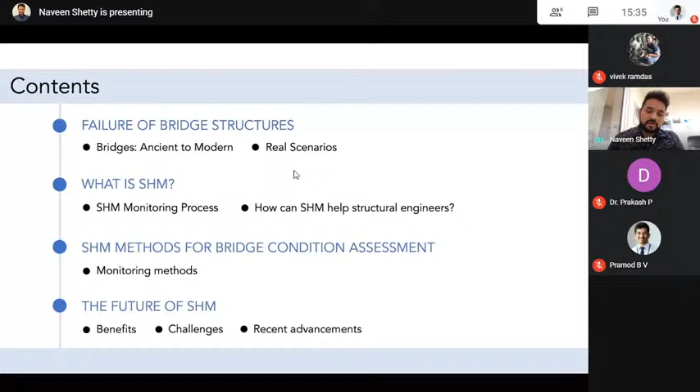We all know that bridge structures represent a significant proportion of traffic infrastructure. In earlier days, bridges were usually constructed using locally available resources such as bricks, blocks, and lime and cement mortar, and they were designed only for very short span lengths. But the greatest revolution came with the development of the industrial sector, where the volume of traffic increased, and the weight of vehicles also increased. So steel truss bridges came into existence, given main priority because they could cover larger spans and resist heavy weight.

Another important innovation is the suspension bridge. They can cover very large span lengths and avoid any intermediate interaction—they don't have intermediate structures and can cover very large spans. This was one of the very innovative solutions in bridge engineering. With modern developments in concrete technology, by embedding steel into concrete, post-tensioning and pre-tensioning concrete bridges have also been widely used all around the globe.

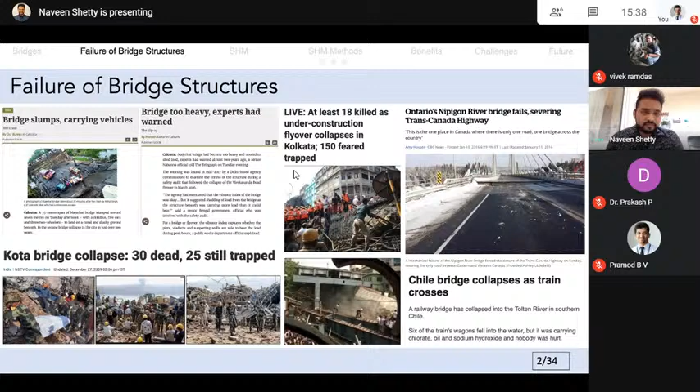So I would show you some real scenarios. This is the first, very recently in 2018, the collapse of the Morandi Bridge in Italy, which was a major disaster that killed almost 43 people, with many severely injured. The latest reports indicate that this bridge was exposed to air pollution from nearby industries, and also had salty sea air. This led to corrosion development in the bridge, and the inspection was not properly performed, so finally a 200-meter section of the bridge collapsed. This is one of the major disasters that happened, and what we learn from this incident is that disruption to traffic infrastructure can have a tremendous impact on economic growth and also on the daily life of citizens.

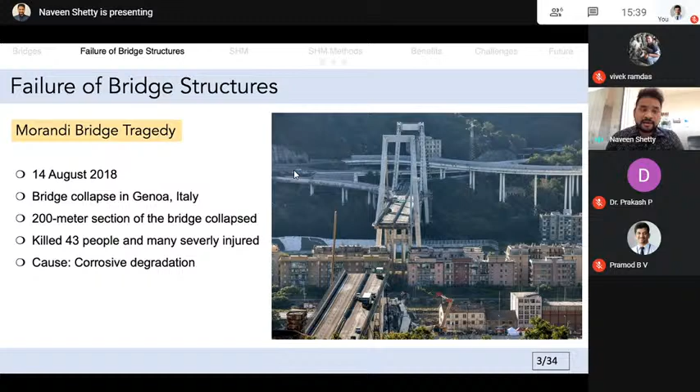Very recently, this year in April 2020, another bridge collapsed in Italy. Due to the coronavirus pandemic there was a lockdown in Italy, so there were not many people traveling on this bridge during the time of collapse, and only two people were injured from this incident. Reports indicate that there were major cracks developed in the pavement of this bridge, and it was reported to the building inspection people to have a look at these cracks, but they reported, maybe last year, that it was not a major crack and could be neglected. But on the 8th of April 2020, the bridge completely collapsed. This revives the memories of the Morandi Bridge collapse in 2018, and alerts everybody worldwide that there is a need for immediate attention towards existing bridge structures all over the world.

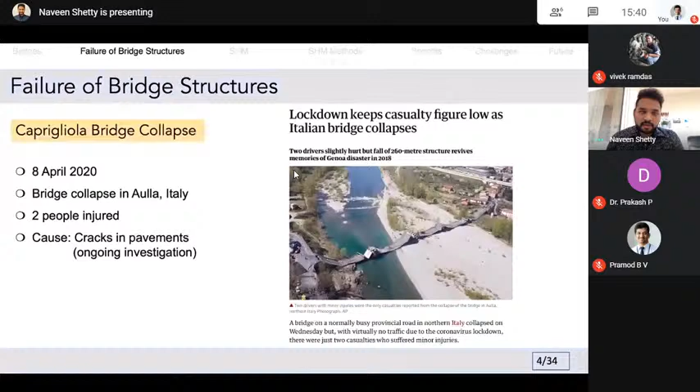And very recently, just 3 days back, a bridge collapsed in Uttarakhand. I would play a short video clip of this.

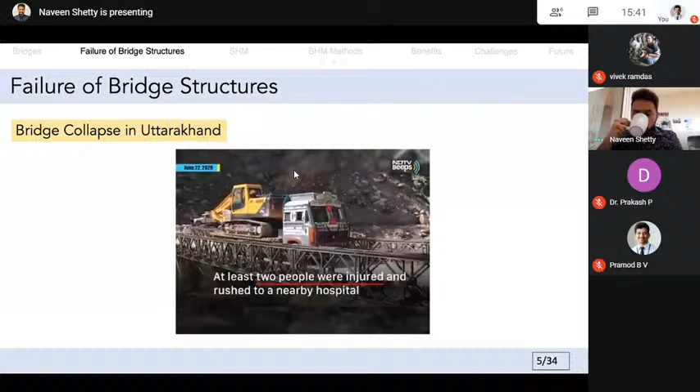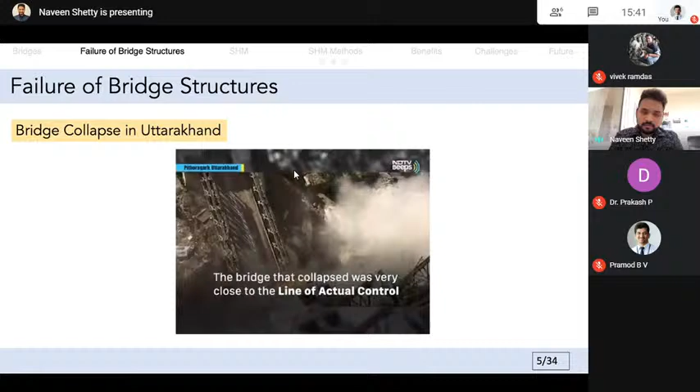So we see that the main reason for this collapse is the truck which was carrying construction equipment. There was a combined weight, and that weight exceeded the load bearing capacity of the bridge, which caused the failure of the entire bridge.

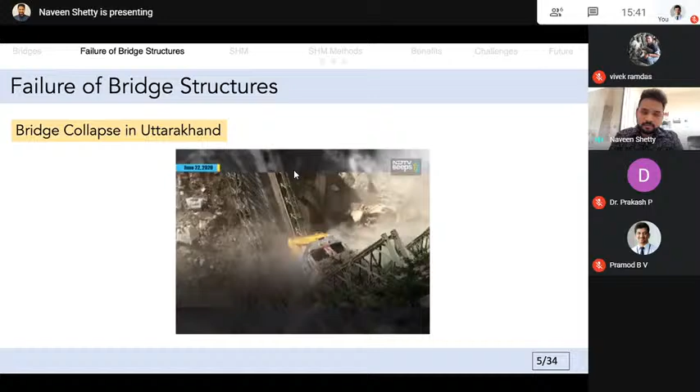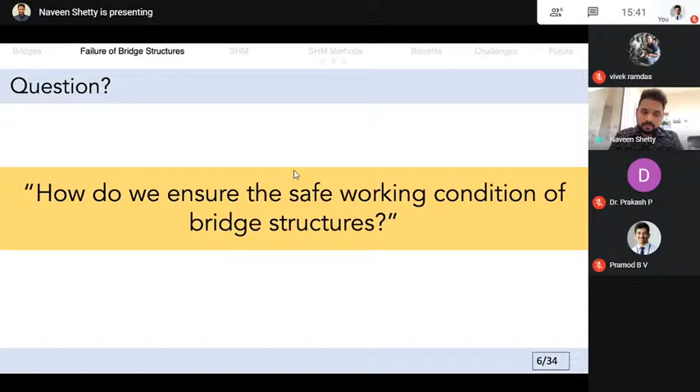So now the golden question is, how do we ensure the safe working condition of bridge structures? In other words, how can we monitor, or how can we prevent such failures of bridge structures? I will relate this to a medical procedure. Normally, when we have a bone fracture, we visit a medical care center. The doctor performs some preventive measures that include lots of tests and screenings, where the doctor tries to locate or indicate the initial damage at a very early stage, rather than letting it become a bigger problem. We can take this concept into our civil engineering context, and treat structures, bridges in this case, as the patients, and we, the structural engineers, as the doctors, using some diagnostic techniques to identify problems at a very early stage.

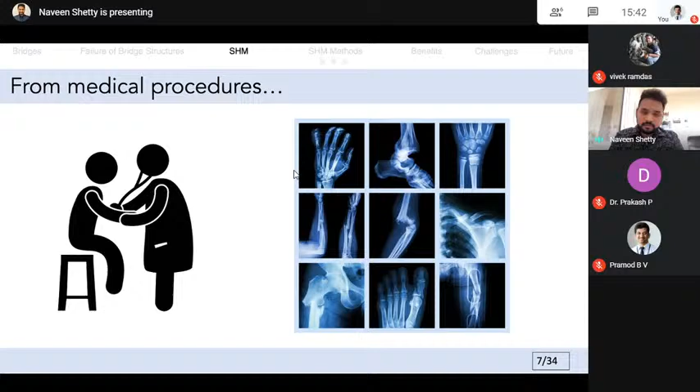So here comes structural health monitoring into the picture. What is structural health monitoring? It is a diagnostic method used on structures to provide important information about structural performance. Nowadays, there are also very advanced structural health monitoring methods which can provide us early warnings even before the damage is foreseen. We can already locate the damages or the intensity of the damage happening inside the structure.

SHM includes a wide range of sensors and also wireless communication, and it is monitored continuously. That is known as real-time monitoring, continuously monitored 24/7.

What is the goal of structural health monitoring? Firstly, it is to detect the damage based on the measurements, and secondly, to locate that damage, in other words, to locate the geometric position of the damage. Thirdly, to quantify this damage. If we know the detection location and we quantify the damage, we can already know the critical condition of the bridge structure.

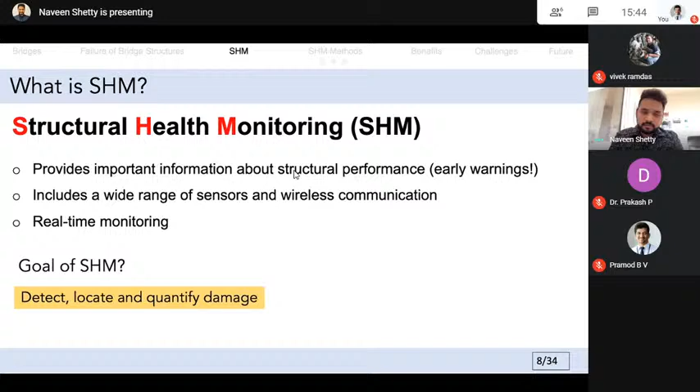The wind speed sensor is usually positioned at the top of the column element, and the temperature sensor is usually deployed at the midsection of the bridge deck to monitor temperature changes. The strain gauges are usually deployed underneath the bridge deck to measure the deflection. Acoustic emission sensors are nowadays usually deployed in the critical zones of a structure, especially in the cables and also in the piers, deck, anywhere. It's a very advantageous method, and I will be discussing it in this presentation in the later slides.

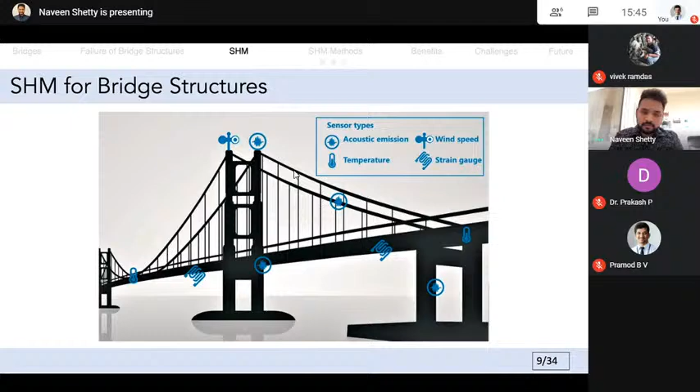The data obtained from all these sensors is integrated together and further processed, and that is known as data fusion. Data fusion is the integration, collecting or gathering the information, and integrating it together. The fused data is further passed to a cloud storage, where we maintain the large amount of data.

Usually now we use a cloud storage platform where we store the data, and then we use certain types of SHM software to perform further analysis. Based on the performance of the analysis, we conduct two other parts, that is reporting and alarming. Reporting is conducted, and based on that we take the further decision of whether an alarm has to be generated or not. This is the process flow for structural health monitoring.

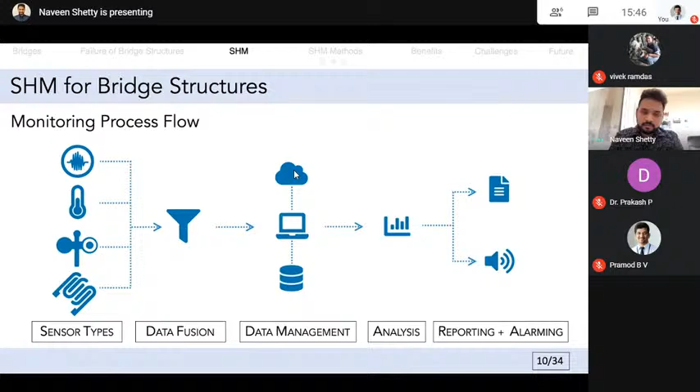Now this is the major question: how can structural health monitoring help structural engineers? Firstly, structural health monitoring gives a very rapid solution, that is, it gives us instant information about what's happening in the structure, and it also reduces the inspection time.

Secondly, structural health monitoring can be easily customized, so we can adopt it to any sort of bridge elements or any type of bridge structure. Another important aspect of SHM is that it is repeatable.

This helps structural engineers monitor the bridges for a very long time. We can also inspect the bridges and look at the maintenance of the bridges for a very long time, and it gives us a lot of information during this period. The information is very related to the structural performance, including structural integrity, or the aging or deterioration of the bridges and so on.

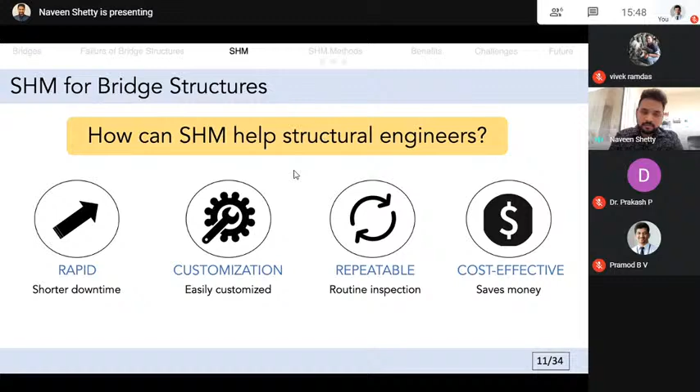Lastly, structural health monitoring saves money. Yes, it's a one-time investment, and if we compare it with the frequency of site visits that a bridge engineer has to do to inspect the structure, SHM might initially be expensive, but in the long run, it saves money.

What data can be gathered from structural health monitoring? Since structural health monitoring is an array of sensors and each sensor has its own different functionality, the following information can be obtained from SHM.

Especially the stress, strain, deflection, and inclination can be obtained from the strain gauges that are usually deployed at the deck of the bridges, and vibration can be obtained from the accelerometers. The crack progress, and even nowadays the corrosion, can also be detected by using acoustic emission sensors.

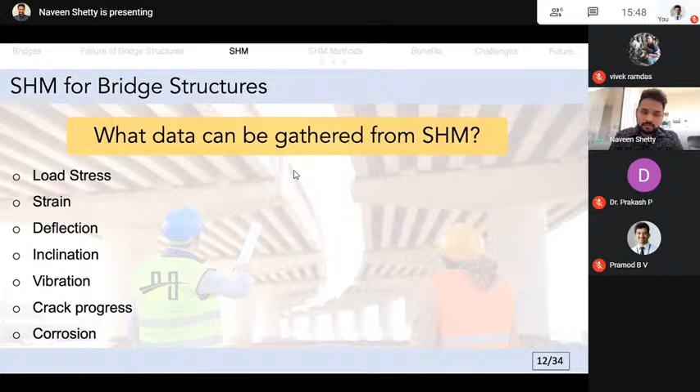In recent advancements, SHM has really benefited from new sensor technologies and wireless communications, which are giving us new developments in SHM methods. The three major solutions for real-time monitoring of bridge conditions are vibration-based monitoring, strain-based monitoring, and acoustic emission monitoring.

In the next slide, I'm going to discuss vibration-based monitoring. Here we have to evaluate the dynamic characteristics of a bridge. In structural mechanics terms, the modal parameters are basically the natural frequencies and mode shapes. Since the modal parameters are very much related to the dynamic characteristics of a bridge, it's easy to note the location and severity of defects by conducting some simulations, and we can also perform this analysis based on the acceleration data obtained from the bridge.

Here I've shown you one example, from our department here at the University of Leuven, where monitoring was conducted on a bridge. Based on the vibration response, different mode shapes were developed, and based on the mode shapes, we could identify the location and severity of the defects in the bridge.

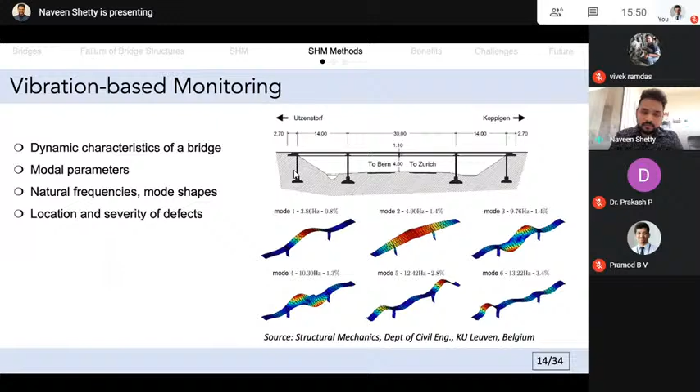In order to perform vibration monitoring, or to study the dynamic characteristics of the bridge, we need to know the vibration measurements. This is basically conducted in two different types: ambient vibration and forced vibration.

In ambient vibration, usually the bridge structures are naturally subjected to vibration because of the movement of traffic, also because of wind, and also maybe due to seismic excitation. All these are considered ambient.

Whereas for very smaller bridges, a sledgehammer is enough to create the excitation of vibration. That is known as forced vibration.

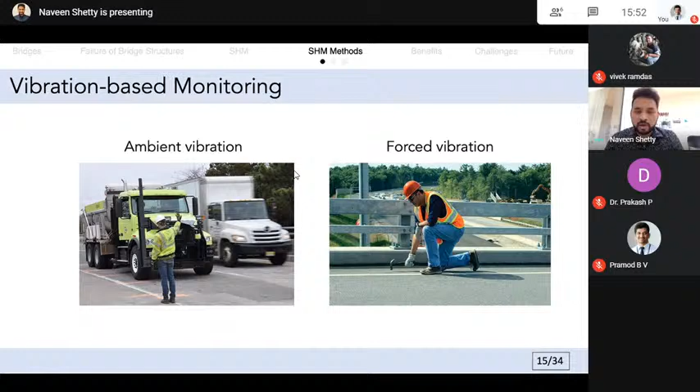They usually measure the vertical and horizontal accelerations coming from the vibrations, and they are very sensitive sensors, sensitive to dynamic motions or vibrations. Based on the design of the sensor instrumentation layout—in other words, the distance between each of the accelerometers—it depends again on the span of the bridge. Based on this deployment, we can also determine the severity and location of the defects.

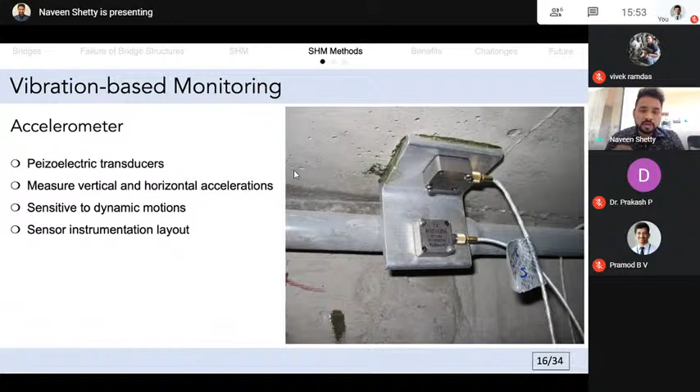So vibration-based monitoring, as we know, is basically used to study the dynamic characteristics of the bridge, and it's on a very global level. So there's a need to know what is happening at a local level of the bridge. This is where strain-based monitoring comes into picture. In the next slide, I will be talking about strain-based monitoring.

In strain-based monitoring, usually strain gauges are deployed at the critical locations of bridges in order to monitor the bridge elements. The main focus of using strain gauges is to record the displacements or deflections of the bridge deck at various locations. Strain gauges are the most popular sensors used widely nowadays.

Also nowadays, wireless strain gauges have come into existence. Strain gauges usually contain a foil within them, and when an external force is applied, the foil gets deformed and the electrical resistance changes, which can be measured. That's the main working principle of strain gauges. They are usually deployed on the surface of structures in order to measure surface defects.

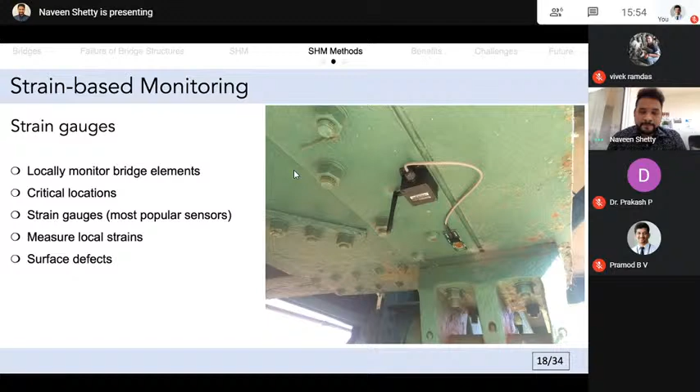There are various types of strain gauge sensors, like linear variable differential transformers, vibrating wire transducers, inclinometers, and fiber optic sensors. The linear variable differential transformer, as the name itself indicates, is used to measure linear displacement between two points.

Linear variable differential transformer is an electrical transformer that can convert linear displacement into a corresponding electrical signal. Vibrating wire transducers are normally steel wires, but they work on the concept of resonance frequency of the vibration. Inclinometers are usually positioned at the cross joints of the piers and the deck, and these sensors are used to measure the inclined angle of slope in relation to gravity.

Lastly, the fiber optic sensors, which are presently in great development and have been widely used in civil engineering applications. They are basically used in bridges to measure different parameters such as pressure, humidity, temperature, strain, and vibrations. So these are some of the strain gauges that have been deployed in bridges for monitoring of bridge structures.

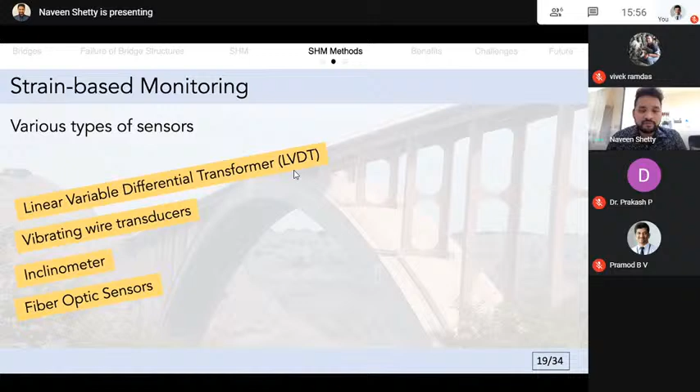So up to now, we saw that vibration-based monitoring was on a global level, mainly to study the dynamic characteristics of the bridge. And we saw strain-based monitoring, which was applied on a local condition to measure the deflection or deformation, basically the mechanical properties of the bridge. There is a need to know what is happening inside the bridge structure.

So acoustic emission comes into the picture over here. This technique is mainly based on elastic wave propagation. We pass elastic waves into the structure, and by analyzing these waves, we get to know the structural integrity of the monitored section.

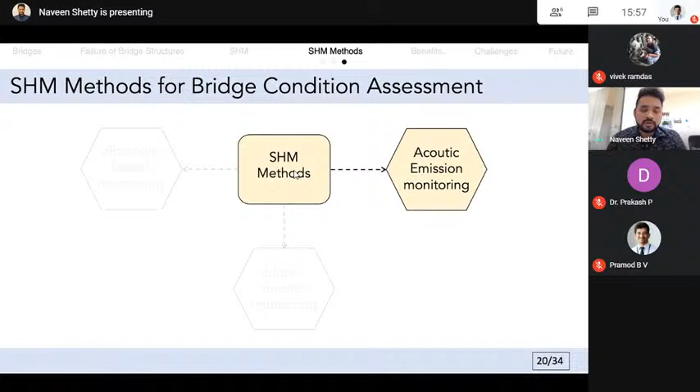So acoustic emission is a unique monitoring method because it can identify the geometric position of the damage even before the crack is visible to the naked eye.

So the working principle of acoustic emission is as follows. When there is a micro crack in the material, the localized strain energy is released in the form of an elastic wave with sufficient amplitude, and that wave travels in the material and reaches the nearest transducer deployed onto the surface of the material. This is basically the phenomena of acoustic emission monitoring.

The transducers, usually referred to as acoustic emission sensors, are glued or attached using some kind of petroleum jelly onto the surface of the structures. The sensor takes the mechanical energy carried by the elastic waves and converts it into an electrical signal.

The electrical signal detected by the sensors is then passed to the amplifiers. The amplifiers register these electric signals, filter them, and amplify them, then further proceed it to the acquisition unit. The acoustic emission waveforms received at the acquisition unit are further analyzed to derive more information about the fracture mode. So this is the total procedure of acoustic emission monitoring.

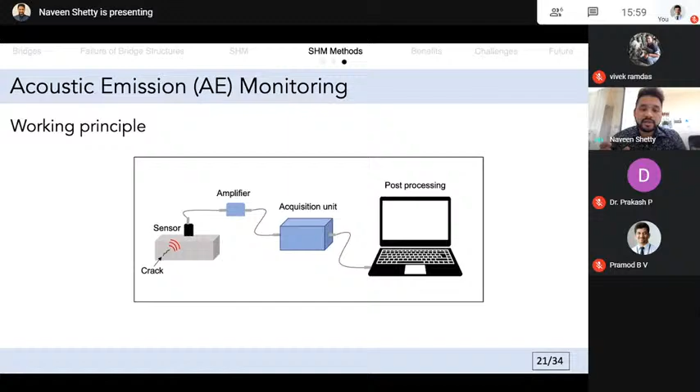As mentioned before, the received waveform in the acquisition unit is further processed. This is the typical AE signal as shown in the first picture. There are certain parameters already defined for this signal, and we analyze those parameters to determine the fracture modes. This is not a very straightforward approach; it involves a lot of analysis, algorithms and methods within the post-processing unit.

The threshold assigned here is basically to avoid background noise, especially in the deployment of acoustic emission on bridge structures. Due to environmental conditions, there are chances that it picks up noise from the background, and it's very hard to differentiate that from the true sources. So we always set a threshold value to eliminate such background noise, and for that we also have to do a calibration test before bringing them into practice.

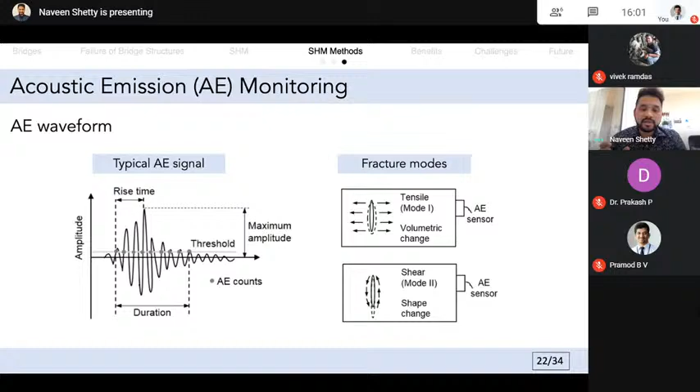As I said before, acoustic emission is not a straightforward approach. And there are two different methods in order to analyze acoustic emission data: the acoustic emission parameter-based approach and the acoustic emission signal-based approach.

So the difference between these two approaches is based only on the collection of the data, the gathering of the data, and the procedure deployed for different analysis techniques. So basically, the difference is the way you collect the data and what procedure you consider for analyzing them in order to determine the condition monitoring of bridges.

So in the next slide, I will present some of the case studies or on-site applications of acoustic emission for condition monitoring of bridges using the AE parameter-based approach. The first application of acoustic emission for monitoring of reinforced concrete and masonry bridges was conducted by Shigeishi, and this originally emerged in Japan, and even nowadays it is widely used in Japan for in situ monitoring.

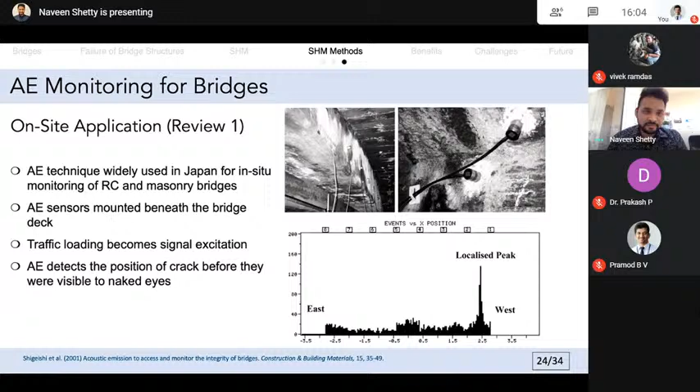Especially in the United Kingdom and also in Europe, there are many bridges, especially masonry bridges, which are over 100 years old, and all these bridges require monitoring methods because of the current traffic density and overloading. They are already subjected to cyclic compression, and that has developed a large number of cracks in these structures.

So the work presented in this paper was something similar, but here the acoustic emission was deployed at the arch of the bridge, and during monitoring the bridge was closed. Two monitoring processes were performed, before strengthening and after strengthening. Before strengthening reflected the situation of the bridge at that moment, and we could see from the results that the acoustic emission produced a lot of high amplitudes during the dynamic loading condition.

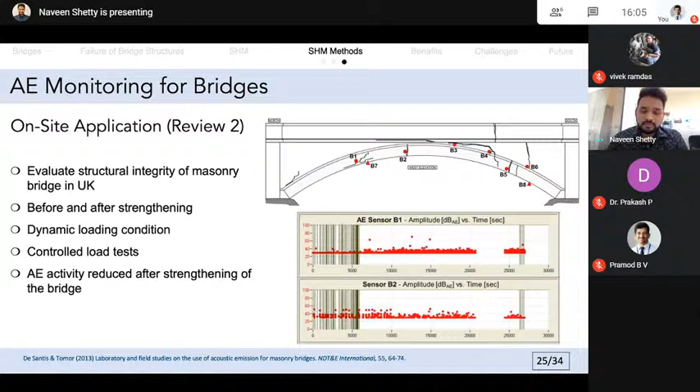So up to now, we saw some of the parameter-based approaches for the application of acoustic emission as SHM for bridge condition monitoring. In the next slide, I will present just one on-site application where they used the AE signal-based approach in order to perform the condition assessment of bridge structures.

So over here, this work indicates that the acoustic emission sensors were applied at the bridge piers, which were already damaged, and that supported the railway bridge, and it had been damaged because of the seismic excitation. So the sensors were randomly distributed over the reinforced concrete pier, and the monitoring was performed based on the train movement. So the train passed, and there was some signal excitation which was received in the acoustic emission sensors.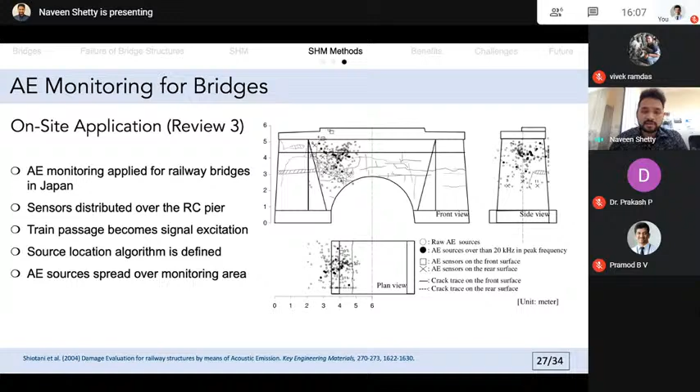So we saw both types of approaches here as an SHM system for bridge monitoring, but there is some limitation for the application of acoustic emission onto bridge structures. The reason is, since acoustic emission takes the emissions from the integral part of the structure, there is also a possibility that it can collect noise. That's the background noise. And also, depending upon the material, especially for steel, it's very applicable because steel is a very homogeneous material, and for steel bridges it is excellent.

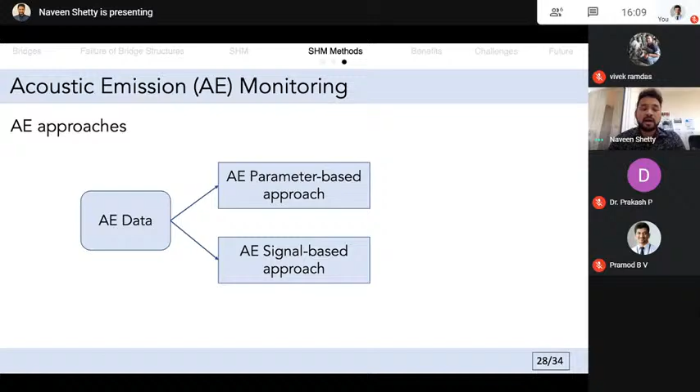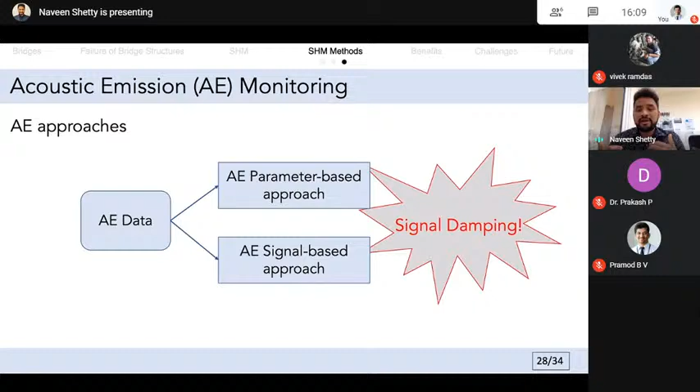And for concrete bridges, yeah, we need to play around with the different types of sensors based on their frequency levels in order to eliminate the attenuation and all these wave propagation properties. Whereas in masonry structures, it's quite complicated because masonry bridges or masonry structures have a huge kind of heterogeneity in them. So this is where the signal damping appears, and this hinders the reliable analysis of the data, and it also never gives a very accurate interpretation of the result.

So this is where my PhD comes into the picture, and in this PhD I have developed a new and very different approach in order to characterize or eliminate such signal damping. So, extensive laboratory tests were performed on masonry samples by applying cyclic compression tests. You may ask me why cyclic, because this is more relevant to masonry bridge structures. Especially in bridges, the loading is performed in a very cyclic way. So that's why cyclic load was applied on the masonry structures, and we developed a new concept of load and calm ratio for the first time in masonry structures.

So over here, I also have proposed some critical damage limits, as we see in the picture on the right hand side, the corner picture. It clearly differentiates the damage into minor, intermediate, and heavy damage. So this is still at a laboratory level, but we can apply this methodology on bridges, and we can also characterize the damages appearing on the bridges into minor, intermediate, or heavy damage. So if you want to know more about the background concept of this methodology, then please feel free to go through my PhD thesis.

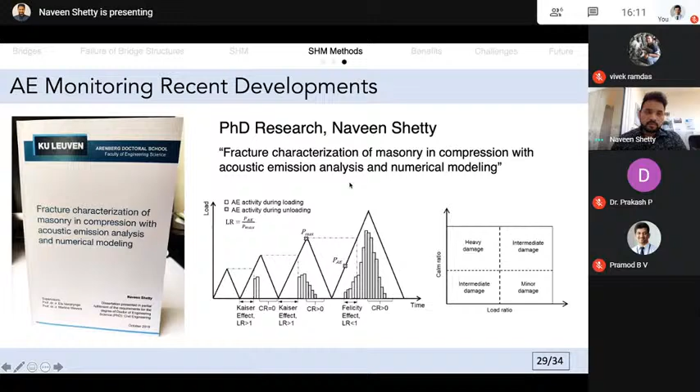So as we saw from all these SHM methods based on real-time monitoring, that is the vibration-based method, the strain-based method, and the acoustic emission-based method, by integrating all this together, we can have some benefits. First thing is continuous remote online monitoring. As I said before, and also showed you in some of the examples, the traffic is uninterrupted. So that means it can be monitored continuously, that is 24/7. And detection of non-visible defects. Here, acoustic emission plays a major role, where it can already detect the defects before they are visible to the naked eye.

Uninterruption to traffic. Yeah, as I said, the bridge need not be closed until it is in a critical condition, but traffic can be ongoing when the monitoring is performed. Reduction of inspection costs. As I said, SHM is a one-time investment, and it drastically reduces the maintenance costs, especially with regard to the frequency of bridge inspection by the bridge inspectors, which is usually performed. Prioritization of repair or replacement.

So by deploying the sensors in different positions, and also different sensors which have different functionalities, we can already receive an enormous amount of data and information, and we can already prepare a further decision regarding the critical condition of the structure, whether there needs to be a repair or replacement of the critical elements. And lastly, the application of structural health monitoring increases the confidence in structural integrity and also in public safety. So these are some of the benefits of SHM.

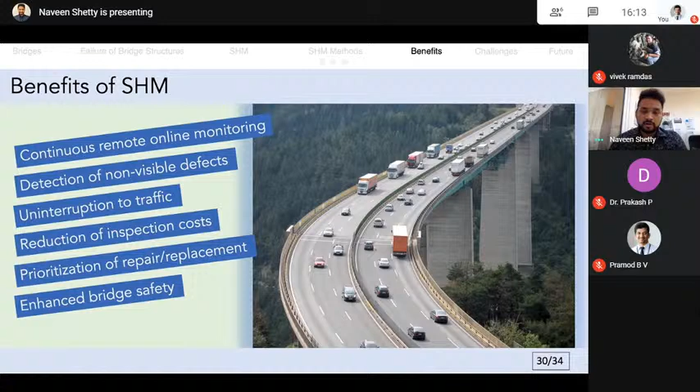Even though we know that SHM has many advantages, there are still certain issues in applying it to real practice scenarios. Why are we still not using it, especially for monitoring bridges? The first thing is the cost of SHM systems. Yes, they are very expensive at the initial stage, but if you compare the SHM cost with other costs like inspection costs, in the later stage it compensates, and they don't have to do regular inspections for the bridge structures.

And secondly, the type of sensors to apply. This always remains a confusing task for project engineers and bridge engineers in deciding which sensors have to be applied. The important thing here is to apply a very good array of sensors. We need to know what damage is applicable in the structure, and which type of sensors can provide us very reliable and enough information. Based on these criteria, we need to select the sensor type.

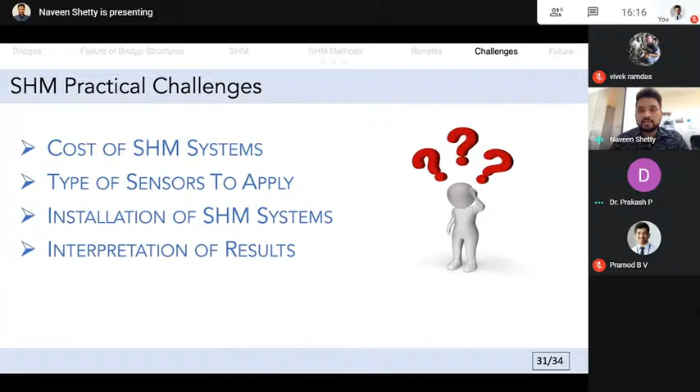And the next thing is the future of SHM. Presently, wireless sensor networks without any wired networks are recently being developed, and also there are micro-electro-mechanical systems, prefabricated sensors that are used. These sensors are deployed into the concrete when the bridge itself is being manufactured, so that they remain there for its lifetime and give us information 24/7 throughout the lifetime of the bridge.

The next thing is the cloud-based approach, which is a very booming thing nowadays with the Internet of Things. It's cloud storage, and all the data, including the raw data, is dumped there, and then the processing takes place. It also does not require you to come to the office to look at the data; you can access it anywhere, anytime through your smartphone.

And lastly, drones, which are replacing individual bridge workers using ropes and truck buckets to reach inaccessible regions. Drones have been very useful, as they can go to inaccessible locations of bridges, and nowadays high definition cameras are installed in the drones, so just by operating the drones we can see very clear pictures of the region of interest, later used for analysis. So all these techniques look very promising for SHM in the future.